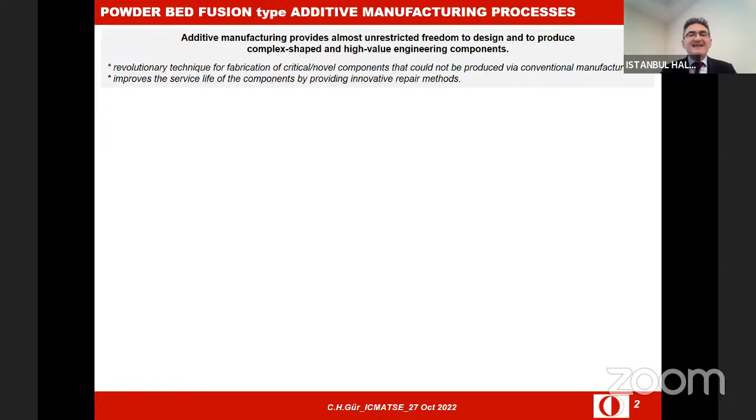As we all know, additive manufacturing provides almost unrestricted freedom to design and produce complex shapes and high-value engineering components. Specifically, powder bed fusion type processes use laser or electron beams to melt and fuse the metal powder.

However, there are some constraints which could seriously impair the structural integrity and functionality of the final products, for example dimensional accuracy, anisotropic behavior, and flaws in the component.

On the other hand, due to non-equilibrium heating and cooling, we have complex physical and chemical phenomena which may negatively affect the microstructure. For that reason, the metallurgical point of view is also very important for the success of the processes.

If we try to list the typical defects and anomalies: porosity, balling, cracking, delamination, microstructural inhomogeneity, dimensional inaccuracy, roughness, distortion, and residual stresses. These defects and anomalies are due to powder processing and post-processing stages, part design, equipment, build direction, base plate, properties of the raw material, process parameters, and also post-process parameters.

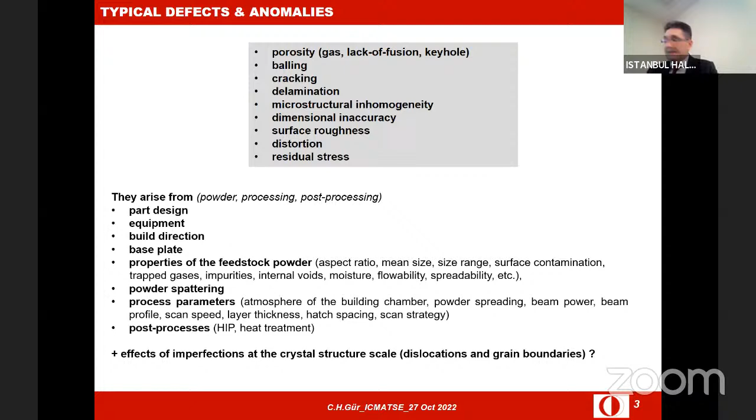We may also consider effects of dislocations and grain boundaries as imperfections, the imperfections at the crystal structure scale.

In literature, the PBF discontinuities are well defined. Here you see some examples related to gas pores. For example, the typical size is approximately 10 microns in electron beam processes, or up to 20 microns in laser beam processes. There might also be possibilities of formation of elongated pores up to 500 microns, balling, unfused powder, and cracking.

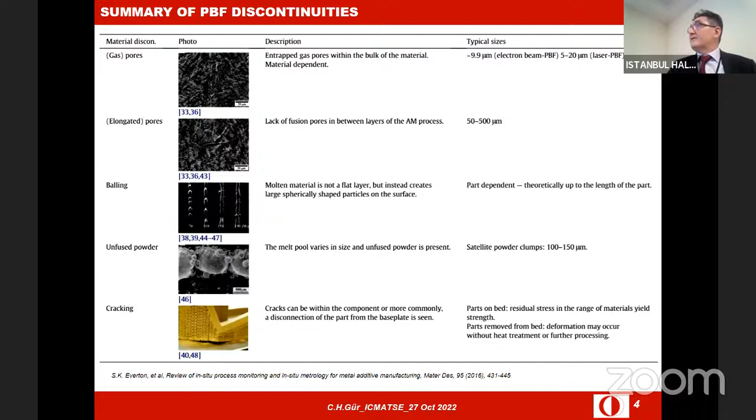What is our motivation? Variation in raw materials and process conditions may result in significant uncertainties in the final component. Specifically, additively manufactured components are widely used in high-duty components and high-duty applications.

We need diverse quality control and characterization techniques. Our aim is to verify structural integrity and performance, to identify and precisely evaluate the defects, and of course characterize material properties. Specifically, material, equipment, and processes must be qualified and certified based on performing reliable tests with a sufficient level of confidence to produce high quality parts.

Also, in-process feedback and closed-loop systems are necessary to control the process variables and performance of the processes.

On the other hand, if we try to perform mechanical tests on the components, there are some drawbacks, because the results of typical mechanical testing may not be sufficiently accurate, since test specimens that are created separately may not accurately represent the product.

Since additively manufactured parts have complex geometry and significant microstructural variability, the application or utilization of traditional non-destructive test techniques is rather difficult. For that reason, there is a need to develop innovative non-destructive tests.

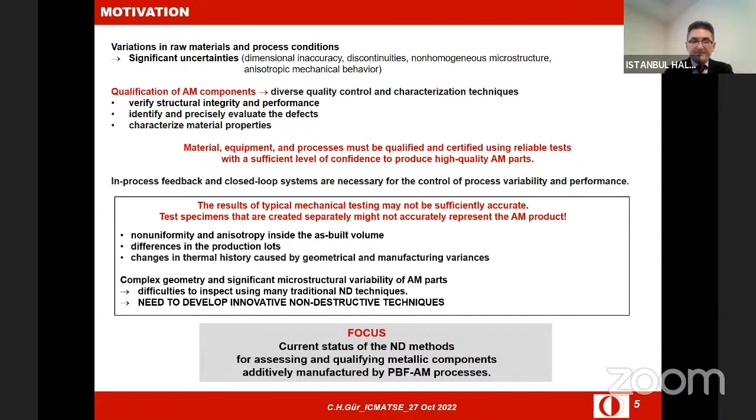We know that in conventionally manufactured parts, non-destructive testing methods have been successfully used to detect surface and internal flaws, to determine mechanical properties and residual stress, as well as long-term structural monitoring to prevent failures. For that reason, under the title of non-destructive testing, we have non-destructive inspection and evaluation to control integrity of components by detecting the defects created during manufacturing or in-service utilization.

On the other hand, there is an important field called non-destructive material characterization, to determine the properties of materials and components qualitatively, and in some cases quantitatively.

As an improvement in the concept, there is a new concept: structural health monitoring or condition monitoring. They focus on safety-critical structures, like in aerospace and nuclear industry. This approach involves feedback-based prediction of structural integrity, and we need onboard diagnostic sensors to collect continuous data about the structure.

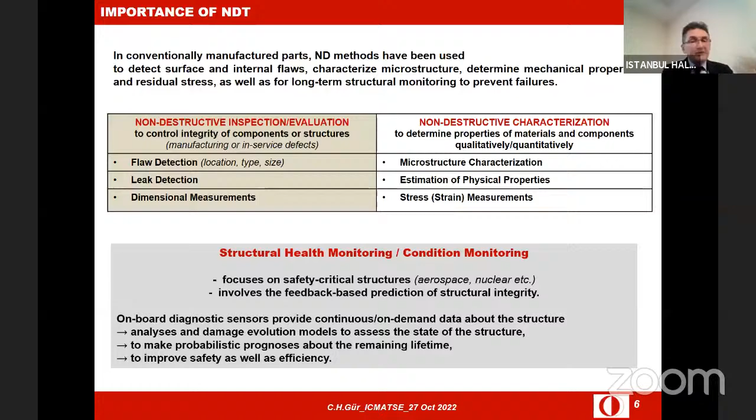What is the importance of non-destructive testing for additive manufacturing? Indeed, process optimization and high-quality products need feedback from non-destructive evaluation. We have non-destructive inspection for assessing flaws, typically X-ray, computed tomography, thermography, and phased array approaches. On the other hand, there is a way called non-destructive characterization for determining microstructure and mechanical properties.

We can say that NDT methods may play an important role in the inspection, verification, qualification, and certification of additively manufactured components. But there is a technological barrier: existing non-destructive methods are not optimized for additive manufacturing processes and products.

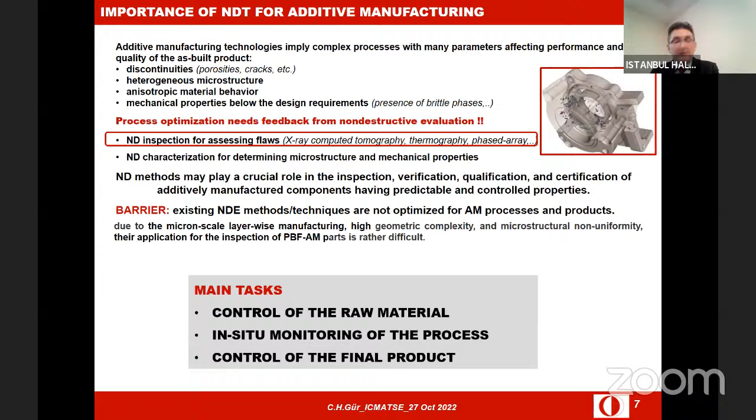If you're talking about the quality control of additive manufacturing, we have three main tasks: control of the raw material, in-situ monitoring of the process, and control of the final product. Let's go step by step.

Control of the raw material is very important because quality and properties of the raw material will directly affect the final product quality. Here you see some examples related to the types of powders having different shapes. There are also tools to characterize the powders: scanning electron microscopy to measure shape and size, aspect ratio, etc., or energy dispersive X-ray analysis to identify chemical composition and microstructure.

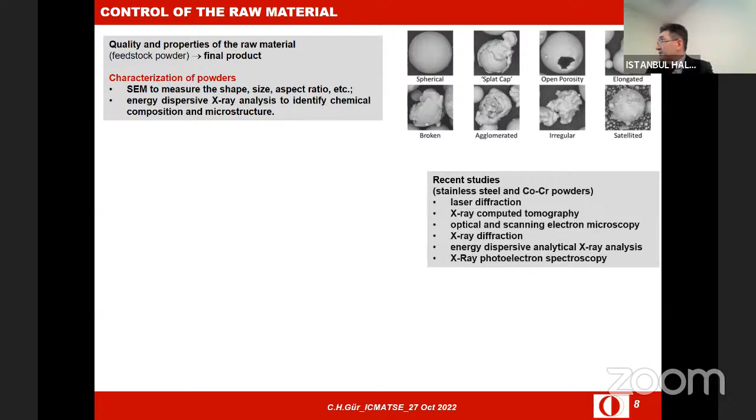There are also new applications of new tools. For example, in a recent study, the authors used laser diffraction, X-ray computed tomography, X-ray spectroscopy, etc. Here you see the range of powders used in laser melting and electron beam melting, between 15 to 45 micrometers, and in the case of electron beam melting, 45 to 110 micrometers.

Following the quality control of the raw materials, the next step is in-situ monitoring of the process, because it is known that any anomaly in the melt pool will result in defect formation. For that reason, we need in-situ monitoring to observe the defect formation in real time. This way, it is possible to reduce the defects by controlling the process parameters, and this approach also enforces development of new NDT qualification techniques.

There are various processes in literature for detection of powder bed anomalies, spattering, powder melting, etc., within the resolution range of 7 to 250 micrometers. The typical examples are visible light, high-speed imaging, high-speed infrared imaging (also called active thermography), high-speed synchrotron or X-ray imaging, ultrasonic wave scattering, and acoustic emission testing.

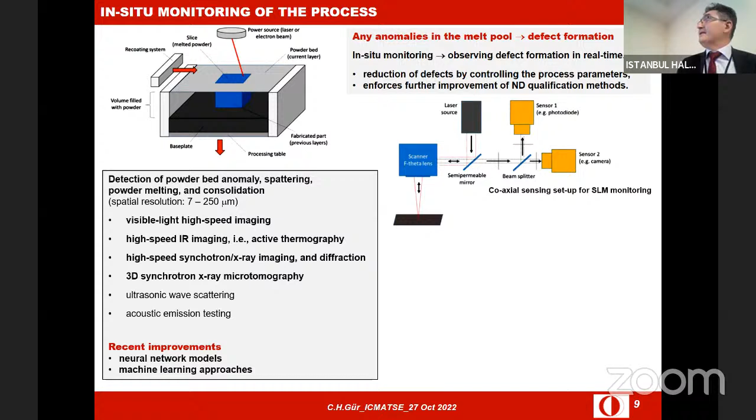Recent studies show there is a trend to include neural network models and machine learning approaches to improve in-situ monitoring. Here are some examples taken from the literature for real-time sensing for selective laser melting or electron beam melting, including application of thermography to collect real-time data from the process.

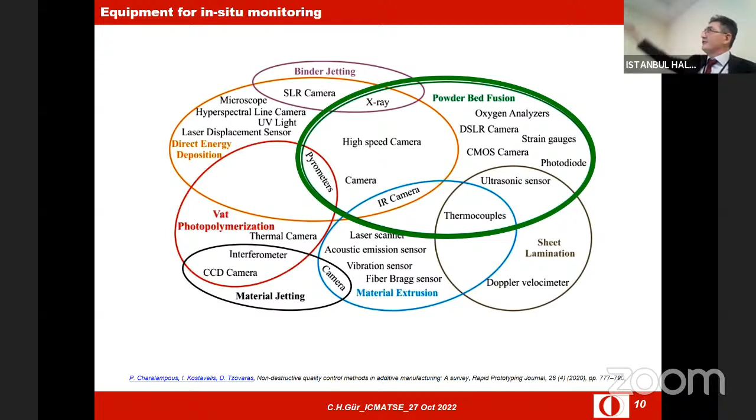In the literature, there is also a figure showing the available qualification processes for different types of additive manufacturing processes. For example, specific to powder bed fusion, here you can see the list of available technologies for in-situ monitoring.

As the final step: first, control of the raw material; second, in-situ monitoring of the process; and finally, we have to control the quality of the final product. The typical parameters are density, dimensional accuracy, surface roughness, residual stress, and of course, detection and evaluation of discontinuities.

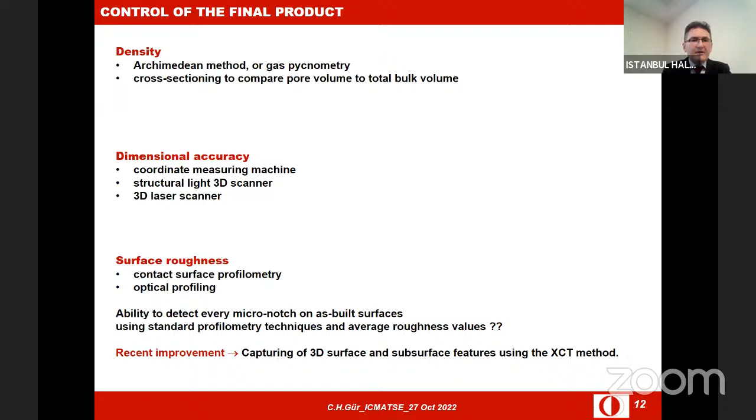Again, let's go step by step. For control of density, the Archimedean method, cross-sectioning methods, or gas pycnometry method is used to determine density. There are also tools to determine dimensional accuracy, for example, coordinate measurement machine, structured light 3D scanner, 3D laser scanner, and finally, for control of surface roughness, we have contact surface profilometry and optical profiling.

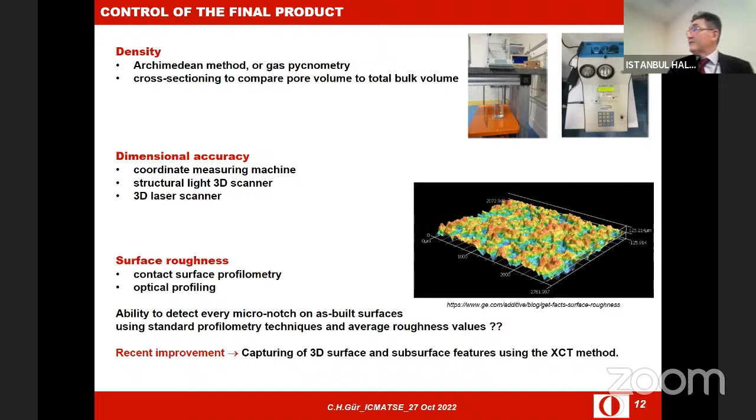However, the ability to detect very small notches and discontinuities on as-built surfaces using standard profilometry techniques and average roughness values is questionable. A recent improvement is the capturing of 3D surface and subsurface features using the X-ray computed tomography method, which allows obtaining surface roughness with very high reliability.

Another important concept is residual stresses. Severe temperature gradients produced by rapid melting and solidification, remelting of previously solidified layers at micron scale, and volumetric change due to phase transformation may result in very complex patterns of residual stress. On one hand, we have complex shapes, and due to these process and metallurgical parameters, we have relatively complex residual stress states. If there is residual stress, we may face risks: poor mechanical properties and performance, especially negative effects on fatigue behavior, and also distortion and lower dimensional accuracy.

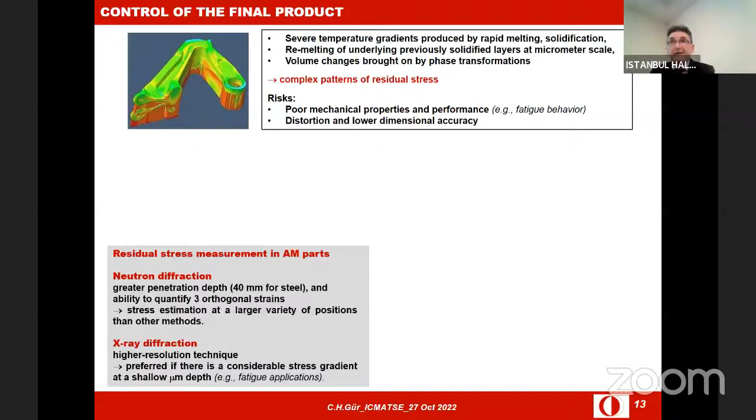In literature, there are some studies to measure the residual stresses of additively manufactured components. Mainly neutron diffraction and X-ray diffraction techniques are used. If they are based on the same issue, the changes in the interplanar spacing will affect the position of the peaks in the diffraction.

If we compare neutron and X-ray diffraction, we can briefly say that neutron diffraction has greater penetration depth, up to 40 millimeters for steels, and it has the ability to quantify three orthogonal strains and stresses, and it estimates stresses at a larger variety of positions compared to other methods.

How can we detect defects in the final components produced by additive manufacturing? The most widely used and most effective one is X-ray computed tomography, XCT. It detects subsurface porosity and features, and it provides information about the individual pore sizes and shapes in 3D. The explanation of this system is very simple.

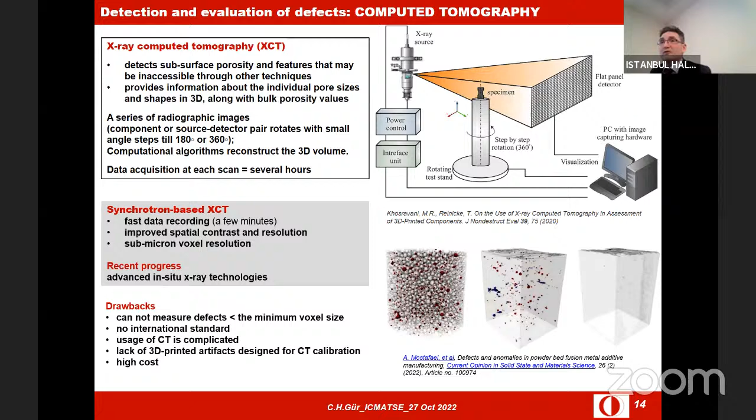Next, ultrasonic testing, pulse-echo ultrasonic testing. Traditionally, it is suitable for detection of various types of defects in a wide range of materials, having high depth. Sound waves propagate due to vibrations of atoms.

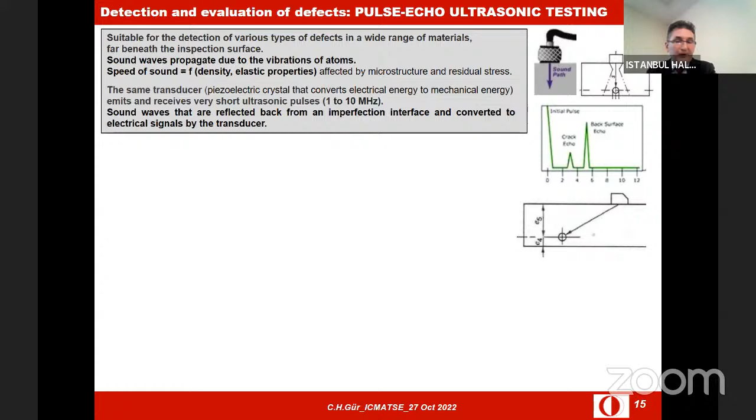In the pulse-echo system, we use the same transducer to produce the sound waves, and sound waves reflected back from an imperfection interface are converted to electric signals by the transducers. We have images, some signals on the screen, and we evaluate them to get information about the material. We have normal straight beam and angular beam probes for this purpose.

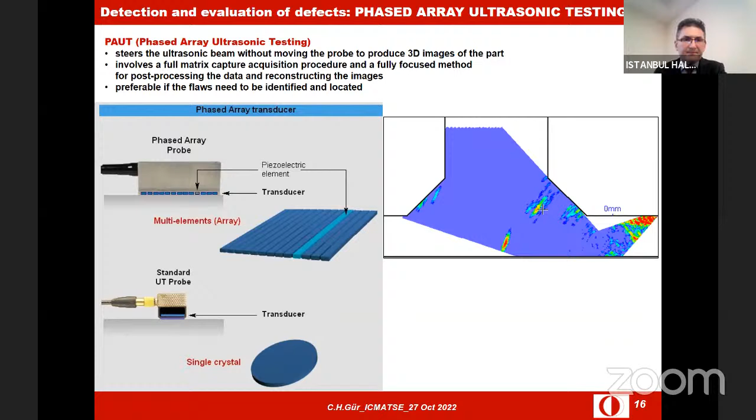The typical example to give you an idea about the phased array ultrasonic testing result is given here. By scanning the structure, the volume, we can define the defects. Of course, ultrasonic testing and phased array ultrasonic testing need surface contact.

For inspection of porosities and lack of fusion in complex shaped additively manufactured parts, we need non-contact techniques. Due to this requirement, non-contact ultrasonic techniques have been developed. Laser ultrasonics creates and detects ultrasonic signals remotely. For this purpose, we use an infrared pulse laser with nanosecond impulses.

These impulses cause a reversible thermoelastic deformation at the surface, and also create surface and volume waves in the component. By using laser interferometry, we can detect the surface displacements.

Here you see a typical example obtained by laser ultrasonics. Various ultrasonic waves are produced directly at the surface and spread out into the volume. The reflected and scattered waves from the defects can be detected by laser sensors at different positions. Then, by scanning the laser positions and reconstructing with reconstruction algorithms, we can obtain images of the object.

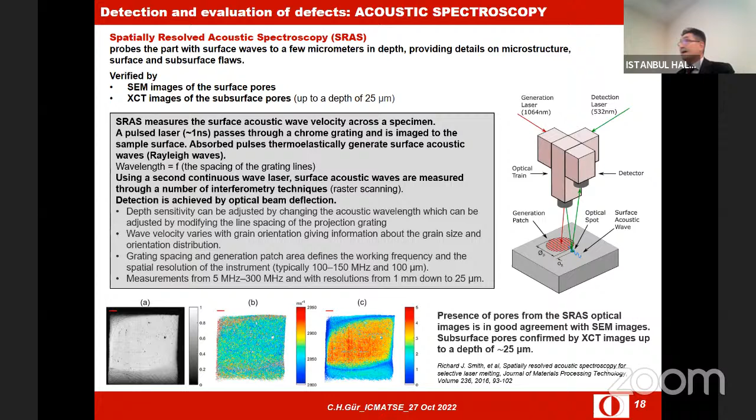Another method is the resonant acoustics method. It's based on analysis of the component's natural resonance frequencies. It is quite effective when we need sorting of defective parts. If the aim is a go, no-go approach in industrial scale, it is very advantageous. It's simply a whole body inspection approach.

First, excite the natural resonance frequencies of the test part by mechanical impulse. Monitor and collect the response of the test by a sensor, and process the data by performing a Fourier transform to obtain the resonant frequency spectrum. Then we compare the resonance spectrum with the spectrum of reference defectless parts. Any shift on the frequency peaks of a part means that there is something wrong in the material, giving a condition for pass and fail.

Acoustic emission is another method based on ultrasonics, and it's a volumetric fast inspection of as-built parts by mounting multiple sensors at different locations. When they apply external load to the system, discontinuities cause the release and propagation of elastic energy, and they create stress waves.

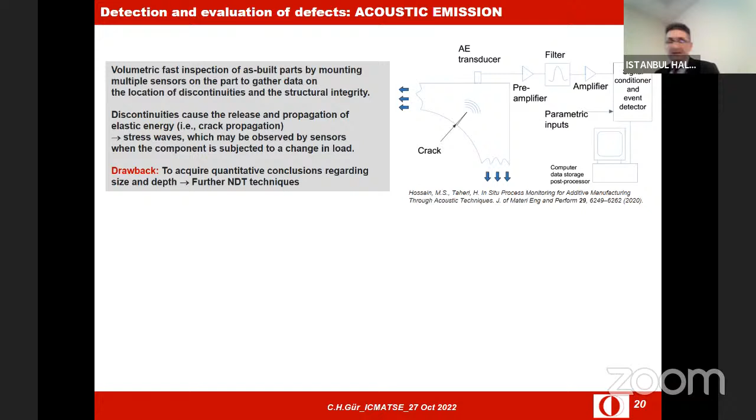These waves can be detected by sensors. The main drawback is we can only get information about the presence of the defect. However, for detailed quantification, we need other NDT techniques. Here you see some examples related to acoustic emission.

Another method is eddy current. It's based on electromagnetic theory. A special coil energized with alternating current near the surface creates a magnetic field, and it interacts in the part, resulting in eddy currents.

If there are some electrical conductivity variations or any discontinuity in the component, it will cause some signals. In literature, there is a paper related to the application of eddy current for defect detection in additively manufactured components. A multi-frequency eddy current approach enables the differentiation of various structures, surface textures, and various pore size lattice architectures simply by measuring the electrical conductivity.

However, it has some restrictions. It is effective at very low depth, and it is not appropriate for components having a volume less than 1 centimeter cube.

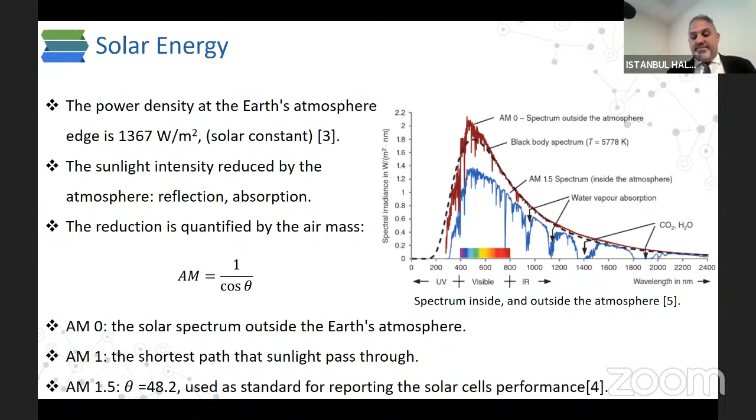Now, again, it's not perfect. Many things can go wrong - light reflected back, recombination at the interface - so you don't get one electron for every photon. So you may get 20 or 30% efficiency, and that's what we try to improve with time.

There are some key parameters we deal with in solar: the current, how much comes out of your solar cell, and the voltage. When you buy a solar panel, you'll see a label that tells you the current, power, and voltage for your solar cell. There are other important parameters too, like efficiency, which is how much power comes out divided by the power provided. We try to get this power efficiency to be as high as possible - ideally we want it to be 100%.

But again, we're limited by the materials we have, because the sun has to be absorbed in those materials. We have semiconductor silicon, which has a certain band gap, so it's only going to absorb a certain part of that big sun spectrum. That's why we stack various materials on each other and do various engineering to improve those efficiencies. Okay, so that's a little bit of background.

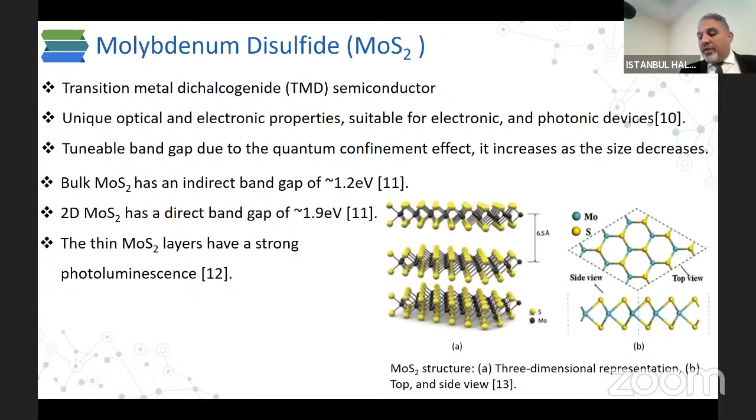Before that, I wanted to briefly mention that before this MoS2 work, we did some work with one of my former PhD students where we made a graphene silicon solar cell in our lab in Khalifa University, where the student grew graphene by CVD and fabricated a solar cell with quite high efficiency. It's one of the early results in this field. And what made that work unique was the challenge of the interface between the graphene and the silicon. Because if you leave it for some time, you get oxidation, which hurts the interface. You get a lot of traps and it ruins the interface between the graphene.

So we said, okay, let's try to put a very thin interfacial layer of ALD to improve that interface. And you can see here the two different devices, one with the passivation, one without. From the solar cell I showed you before, we can see a very nice improved efficiency, fill factor, and current with the ALD. So that was one of our first experiences in 2D materials in solar, and one of the first work showing ALD use at the interface.

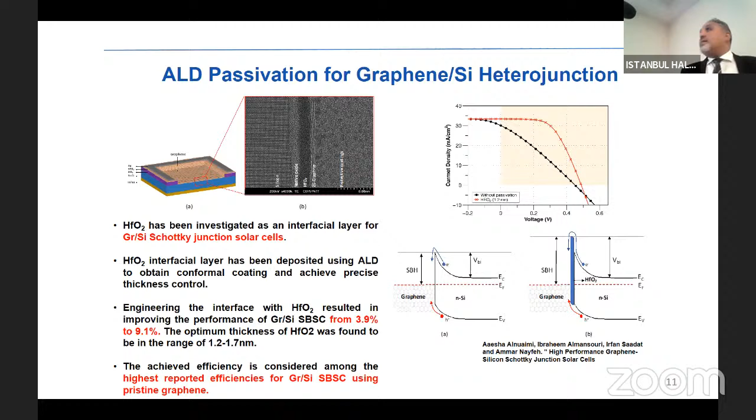So when I first joined the university in 2010, it was a new kind of university, and we had this basically an empty room that we had to develop into this clean room facility. It took a lot of time and effort, but now we have a functional working clean room we've had for the last 9 or 10 years.

It's the only clean room in the UAE and one of the first in the Middle East in that part of the Gulf world. We were able to do ALD, atomic layer deposition, lithography, graphene CVD, and we fabricated many devices in this laboratory.

So many of the KU publications and PhD theses come from this facility. We also have amazing microscopy where we can analyze these devices. We have one of the highest resolution TEMs in the world, able to look closely at the interface to analyze the physics of what's going on. We can also measure solar cells using solar IV and quantum efficiency measurements in the laboratory.

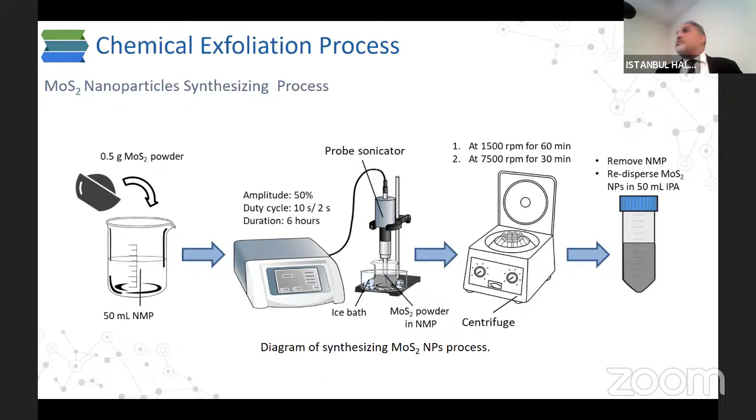If you look at the final bottle of suspended MoS2 nanomaterials ready for deposition, that's how it looks - it kind of looks all solid, like a rock in some aspects. When you move them to the end, that's the final one we can use to deposit our material.

So how do we take that and make a layer, make a thin film? We did it with what's called drop casting - a quite simple, straightforward method. We clean the substrate, passivate it with hydrofluoric acid to make sure there's no dangling bonds or native oxide, and immediately we drop a known exact quantity, then let it sit there and let the solution evaporate for some time.

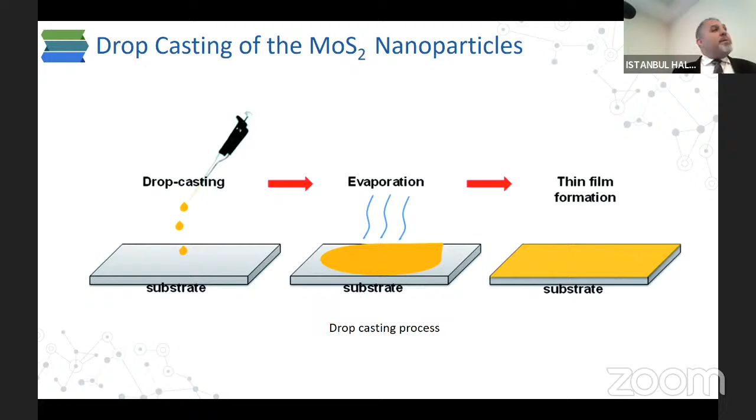Eventually the solution evaporates and you're left with what's called a thin film of MoS2. The more quantity you put, the thicker you can get, or the more coverage you can get of the MoS2. This also took some time to optimize the process.

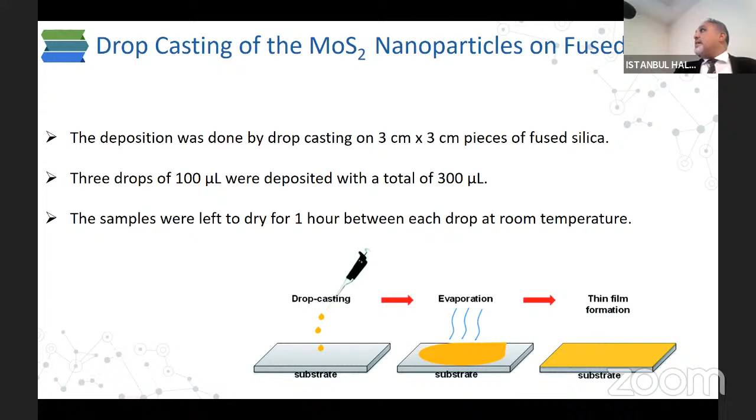Okay, now that we have the material, how do we make the actual device? The first thing, we took a silicon, but in this case we wanted to characterize it first. So we took a fused silica, kind of like a glass type material, deposited and left it, and created our thin film.

Then we wanted to understand—I told you the MoS2 had a certain band gap in literature—but we wanted to see what band gap our MoS2 was giving. So in order to get the band gap, we wanted to shine some light through it and see how much light is being reflected, how much is being transmitted, and how much is being absorbed.

Based on that, we can calculate the band gap of the material. So what's plotted here is transmission, reflectance, and absorption of the MoS2 with different quantities. On the far left is transmission. The black line is fused silica, so everything goes right through. Once you add some MoS2, you can see the red—there's some absorption happening—and by the time you get to 300, a lot of it is being absorbed.

You can see in the reflectance and absorption curve on the far right, almost 80% of the light is being absorbed up to around 750, and then it starts to drop a little bit. But the main conclusion is we get a very high amount of absorption for a very thin layer. That made us believe this is a good material for solar, because it can absorb a good amount of light. So how do we get the band gap?

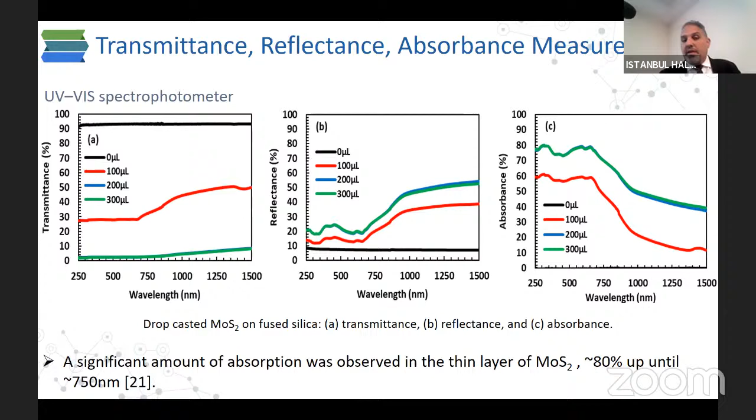So how do we then continue making the actual solar cell? In our clean room, we were able to take a silicon wafer and cut it into a certain square. The wafer was already p-type. Based on our literature, we knew that MoS2 would behave like an n-type material. So we started off with a p-type, just based on our own literature review.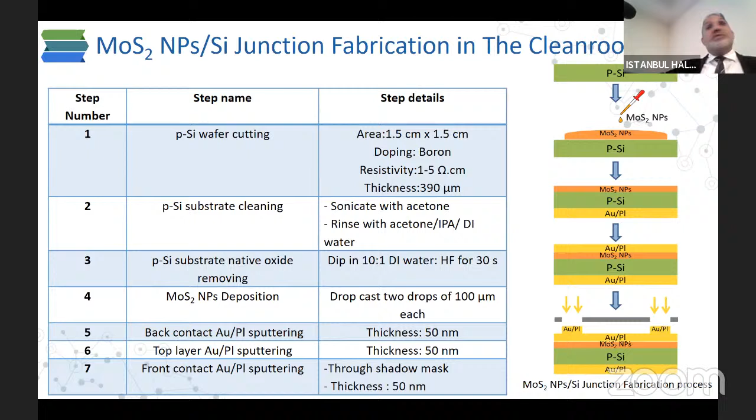And when we did our conductivity measurement, it confirmed that it was an n-type. Then we do the drop casting we mentioned, and after that we have a layer. We can then put our metal and etch the metal to create our structure. So at the end, we have an MoS2-silicon device, and then we have a contact on top to measure it.

That's how it looks—that's a mask we use to put the metal. The metal will come through that mask and create fingers of metal. We can also deposit some metal using what we call a sputter coater at the time for the metal. The final device looks like that. That's our solar cell on the left, and that's the cross section—a metal finger array, followed by the MoS2, followed by a silicon substrate.

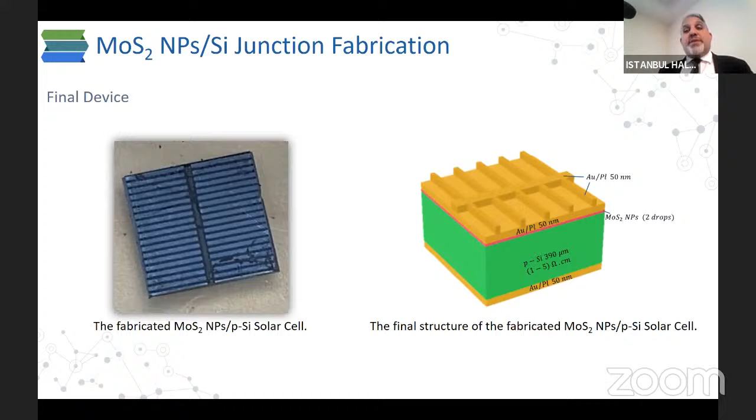The reason we do that is, if I make a solar cell and you guys make a solar cell, we have to be able to compare. If everybody's measuring at different parameters, it doesn't make sense. There's a famous plot by NREL in the US where they plot solar cell data as a function of device and time, and all that is done properly at the right condition.

But the good news from a physics standpoint is we do see a working PN junction from MOS2 silicon. The improvement in the parameters will come as we improve the performance. We're also going to try the ALD interfacial layer and make the metal contacts a little bit thicker, so we get some improvement in the device.

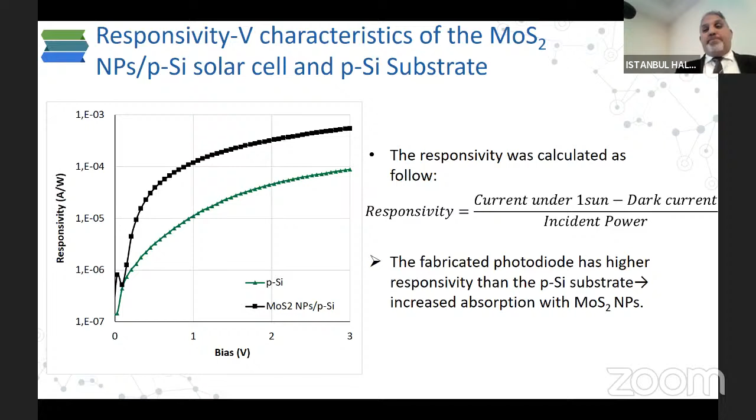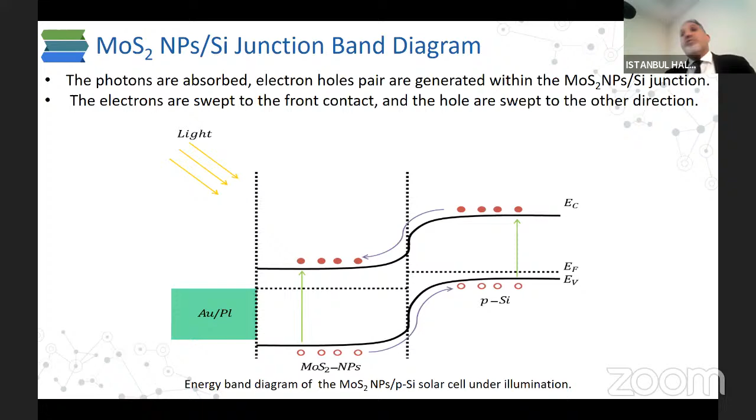So if you look at it more closely, the light will come in, it's absorbed in the MOS2 silicon interface. We get the electron hole pairs, and we're able to separate the electrons and the holes at the interface and measure solar cell parameters. It's a good first step, and one of my students is now working on improving this process.

So in summary, we used MOS2 nanoparticles, synthesized using chemical exfoliation. We used SEM to show some good coverage, made a thin film. We showed very high absorption of the MOS2 nanoparticle. We made a solar cell and photodiode with the MOS2, and we confirmed the solar cell is working, getting very high absorption from the photodiode. We saw a large increase in current, meaning the responsivity is very good, and the absorption in the MOS2 is quite great for a photonic application.

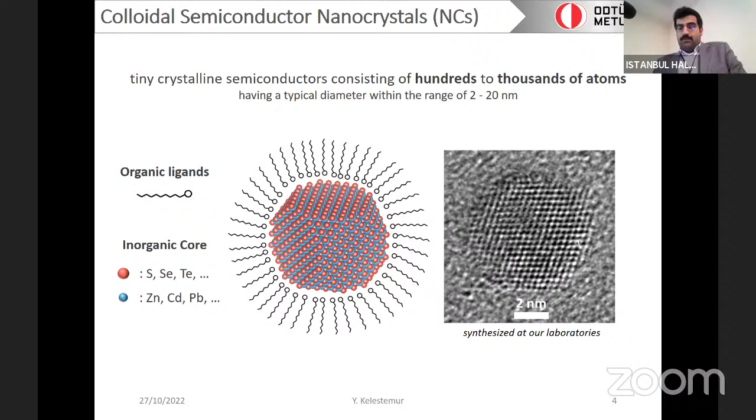Colloidal semiconductor nanocrystals can be defined as tiny crystalline nanoparticles. As you can see from these transmission electron microscopy images, they're composed of an inorganic core having a crystalline structure, covered with organic ligands which allow them to form soluble suspensions in different kinds of solvents.

What's unique about these nanocrystals, what makes them effective, is the observation of the quantum confinement effect at that length scale. For bulk semiconductors, we've discussed the conduction band and valence band, which are separated by a certain energy bandgap.

However, this bandgap is fixed and depends on the material. We can tune it by alloying or other approaches, but it's not easy to control easily. But when we synthesize any kind of nanocrystal, without changing the composition, simply by changing the size of the nanocrystal, we can observe discrete changes in the band structure of the material.

Due to having a finite number of atoms in the structure, the band structure becomes quantized, and as we decrease the size of the nanocrystals, the bandgap increases. These are some of the main attractive properties of nanocrystals.

As a result, they exhibit size and shape dependent optical properties. Here, for example, you can see absorption and photoluminescence characteristics of cadmium selenide nanocrystals. These are all the same nanocrystals, but depending on their size, we can obtain emission at different wavelengths. Typically, as we increase the size of the nanocrystal, their emission shifts from blue to the red side.

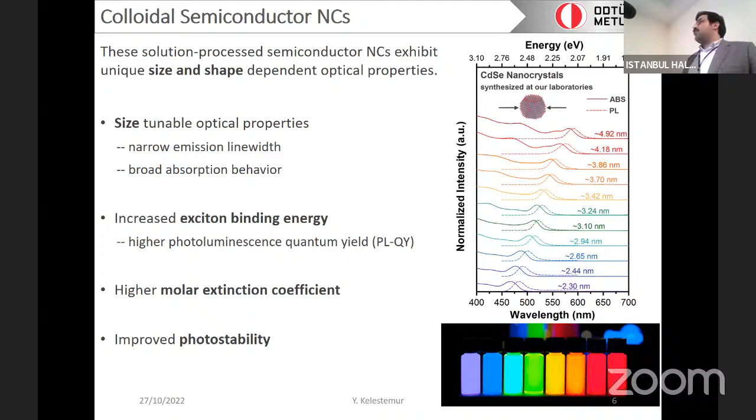And also they exhibit very high molar extinction or absorption coefficient. And when we compare their stability as compared to traditional organic molecules, they exhibit improved photostability.

Their synthesis is also very simple. It's similar to cooking, or in chemistry they are called a cooking. What we are doing is we typically add our solvent and precursor.

After the dissolution of, for example, for the synthesis of cadmium selenide, first of all we dissolve one of the cadmium precursors. Then at high temperature we immediately inject the second precursor into the solution, and it causes an increase in the concentration of the precursor in the solution above the nucleation threshold. So this nucleation process is started.

After that, since most of the precursors are consumed during the nucleation, the concentration of the precursor decreases below the nucleation threshold. So the synthesis continues with the growth process.

Initially this was a kind of black box, so it was not easily known what the effect of the precursor was. But nowadays the control over the synthesis has greatly enhanced.

We can synthesize different sizes and shapes of nanocrystals having highly monodisperse and uniform size distribution. It is even possible to synthesize heterostructure nanocrystals, which means we can combine more than two different types of materials in one nanocrystal.

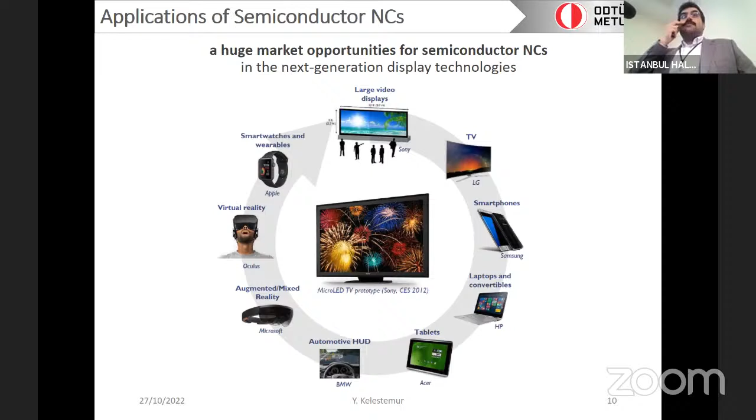Nowadays in many electronic devices we have started to see this display technology - we can see quantum dots in television. However, in the future it is also expected they can take place in smartphones, automotive head-up displays, and virtual reality. There's a huge market for semiconductor nanocrystals, and it's expected that within 5 or 10 years, most displays will use colloidal semiconductor nanocrystals.

But for the case of spherical shaped nanocrystals, there are some deficiencies or limitations. For example, their emission can be tuned by size, but when we synthesize, there is some size distribution, and as a result we observe some broadened emission spectrum.

When we analyze the emission spectrum of only a single nanocrystal, we observe very sharp emission. However, when we look at the ensemble spectrum, we observe a very broad spectrum. So this is one of the limitations - we want to further achieve very sharp emission from this nanocrystal.

The second problem is the enhanced Auger recombination rate at this small length scale. Typically, what happens is when we excite a semiconductor, electron hole pairs are generated, and after some time they recombine and emit photons.

However, at high excitation, or when we pump our nanocrystal very hard, more than one electron hole pair can form in the nanocrystal.

However, sometimes the recombinational energy of the electron-hole pair is not released as a photon. Instead, it can transfer to a third particle, either electron or hole, so it's a kind of non-radiative loss. Typically for nanocrystals, these Auger recombination rates are enhanced, which is one of the drawbacks of semiconductor nanocrystals.

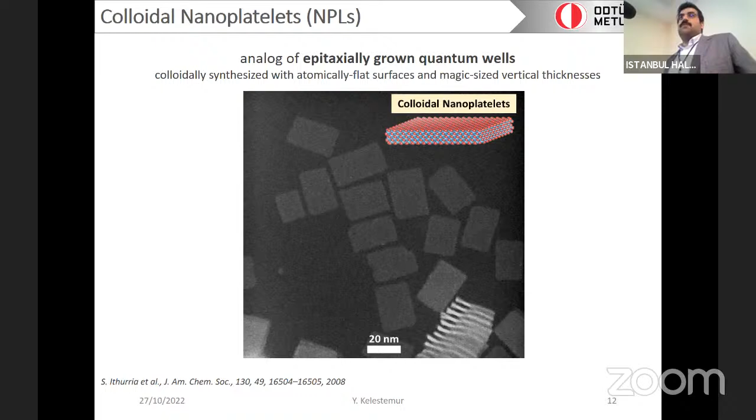These are TEM images where you can see the lateral dimensions are tens of nanometers, but the vertical thickness from the stacked nanoplatelets is just 1 nanometer. So they can be considered analogs of epitaxially grown quantum wells, with the difference that we don't need any special substrate to grow them. We can synthesize them in solution and apply any kind of substrate.

Here we again observe the quantum confinement effect, but this time we can tune their emission and absorption characteristics by changing the thickness. As we increase the thickness, we again observe redshift in their emission and absorption characteristics.

What is so important, or so attractive, about this nanocrystal is that this larger surface is atomically flat. This means that in a solution of nanoplatelets, all of them have exactly the same thickness. As a result, there is no broadening effect due to size distribution, and so they exhibit a very narrow emission line.

It's one of the narrowest emission linewidths compared to any organic or inorganic emitting materials. They also exhibit very high oscillator strength, with electrons and holes strongly confined, because in addition to the confinement effect, dielectric confinement also contributes. So these electrons and holes have a giant oscillator strength, and due to their two-dimensional structure, this also helps further suppress Auger recombination.

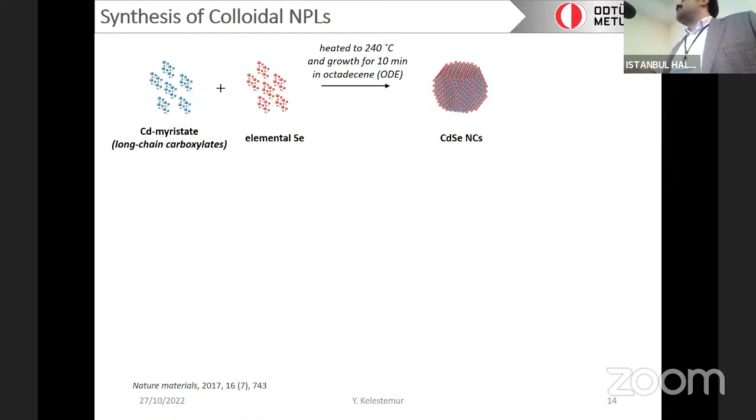As I said, it's a kind of accidental discovery. Typically for cadmium selenide nanocrystals, we use a long-chain cadmium carboxylate as the cadmium precursor and elemental selenium, with octadecene as the solvent. When we heat to 240 degrees and wait about 10 minutes, we end up with spherical-shaped cadmium selenide nanocrystals.

However, when after nucleation of small cadmium selenide nanocrystals we introduce a short-chain cadmium carboxylate, such as cadmium acetate, in addition to the normal nanocrystals, we observe that two-dimensional particles are also formed. It's still an ongoing discussion how these particles actually form.

One of the most widely accepted explanations is that adding this short-chain carboxylate changes the reaction kinetics. For example, newly growing monomers, instead of creating islands on the wide faces, find it easier to grow on the narrow faces due to decreased surface energy, so they prefer to grow on the edges.

This is the most widely accepted theory for how these two-dimensional nanocrystals form, because their crystal structure is also cubic, zinc blende. So how such an anisotropic shaped particle forms from that isotropic crystal structure is still an open question.

Since we know this approach works, we now focus on synthesizing different kinds of two-dimensional particles using it. We can synthesize nanoplatelets with the same thickness but tune their lateral dimensions, making them rectangular or square. Since their thickness is the same, they are strongly confined only in the vertical direction, and their lateral dimension doesn't affect their emission and absorption characteristics.

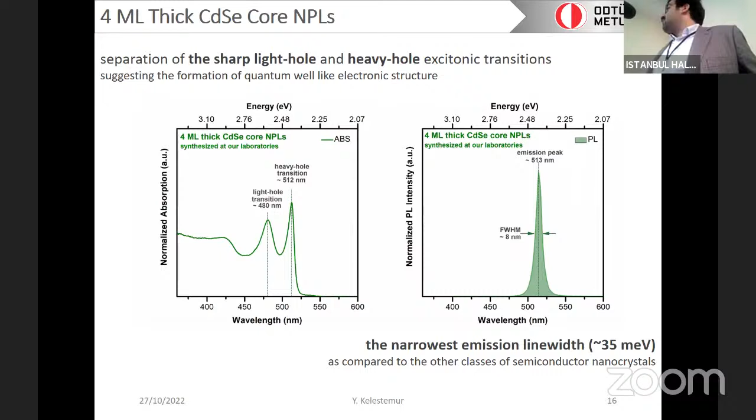We observe emission, for example, at 512 nanometers, with an emission full width at half maximum of roughly 35 millielectron volts. Room temperature KBT is roughly equal to 25 millielectron volts, so this is one of the narrowest emission materials available.

Typically, for the case of nanocrystals, we cannot use this core-only nanocrystal in any kind of semiconductor devices, because typically due to their larger surface area, the surface atoms create some mid-gap states which quench the emission.

So as a result, what happens? This excited electron and hole can be trapped by this mid-gap state, and it decreases the efficiency and also the stability of the nanocrystal. So typically what we are doing is synthesizing some core-shell heterostructures.

Depending on which material we cover or grow on the core material, depending on the band alignment - for example, for the case of type 1, if we grow a material having higher band gap, we can confine this electron and hole away from the surface and increase the efficiency of the nanoparticles, because now the probability to be captured by surface traps is decreased.

So with these two-dimensional nanoparticles, we also have another exciting feature: we can have two types of conditions for growing the shell. It is possible to grow only in the lateral direction without any coating on top of the core nanocrystal, or we can also grow in the vertical direction, having some core-shell structure.

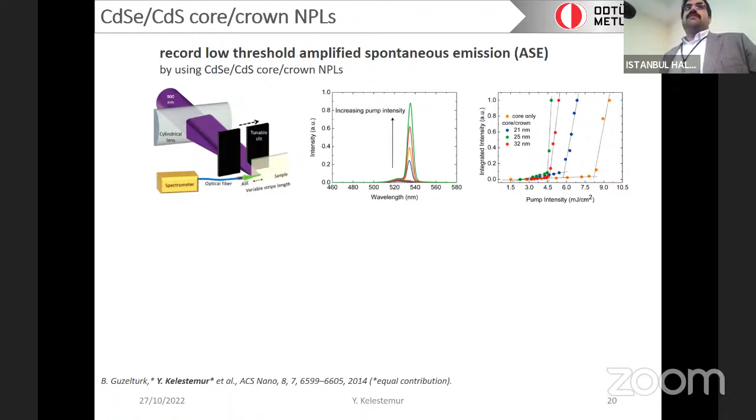Then after that, we use this material as an optical gain medium. We excite with an 800 nanometer femtosecond laser beam, and as a function of the pump intensity we check the emission profile. We realize that after pump intensity exceeds roughly 4 millijoules per centimeter square, we observe stimulated emission, which is required for lasing or optical gain.

After that, we integrated this colloidal material into a DBR. This DBR we made at that time had difficulty with vacuum deposition, so we also made this DBR using silicon dioxide and titanium dioxide nanoparticles. So we demonstrated optical gain using an all-solution-process fabrication.

We take 3 different kinds of nanoparticles and make alternating spin coating, and we obtain one of the lowest lasing thresholds.

After that study, we also wanted to study different heterostructures of this material, and we synthesize different kinds of heterostructures. We also make some alloying, or try different heterotypes of this nanoplatelet in order to tune their structure.

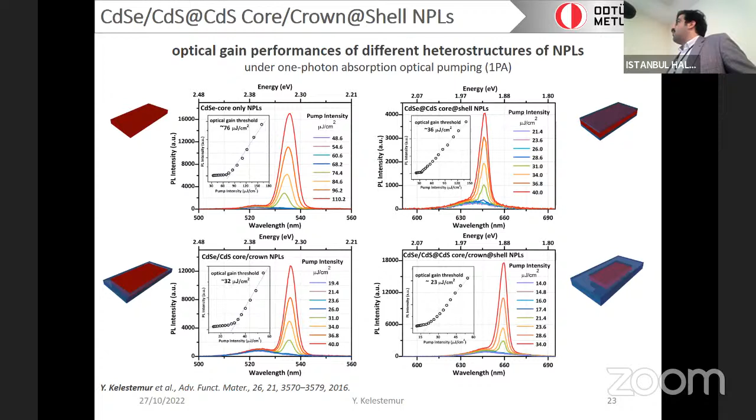This is one example where we grow core-crown-shell nanoplatelets to further encapsulate the core and passivate it very nicely. As a result, we obtain very highly stable optical gain performance.

Another problem: by increasing the thickness we can change their emission, but these emissions occur at discrete wavelengths. For example, a 4-monolayer nanoplatelet always emits at 512, or 5-monolayer cadmium selenide emits at 550.

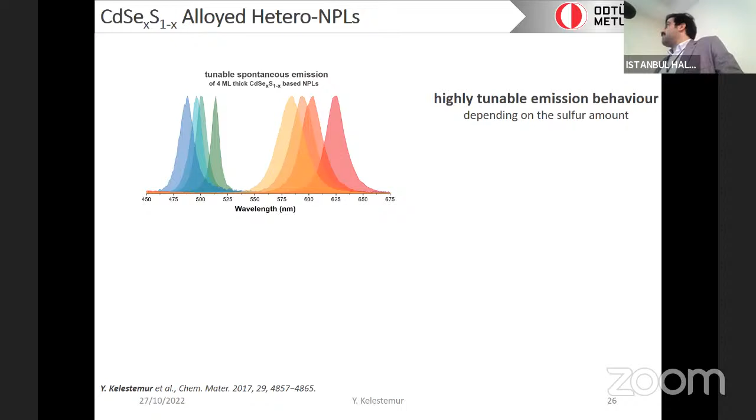In order to cover this discrete emission characteristic, we make some alloying, and as a result we overcome this limitation. We show that it's also possible to synthesize these nanoplatelets with highly tunable emission characteristics, and we demonstrate they can be used as a gain medium for lasers.

As I said, this previous structure can be considered type 1. However, it is also possible to synthesize type 2 structures where, depending on the band alignment, we can separate the electron and hole in the structure.

So this structure is attractive for light harvesting or solar cell applications. When making this study, we also tuned the compositions and achieved highly tunable emission characteristics.

Also another exciting thing, as compared to a semiconductor, this band edge emission due to the combination of electron in the cadmium selenide with the hole in the crown region, they emit a photon having a lower energy than the band gap of these two materials.

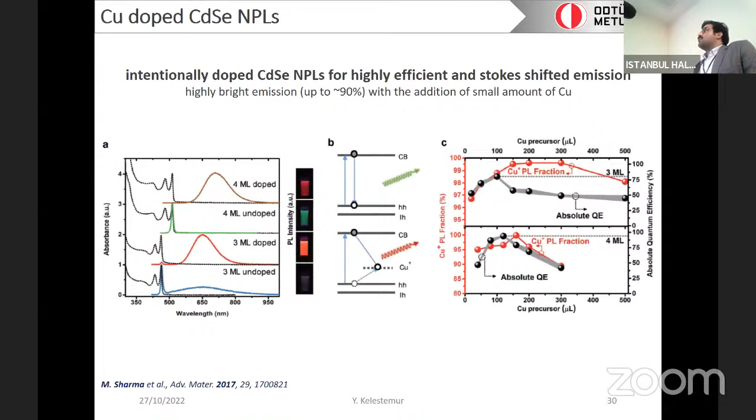So in this study, we made this Stokes shifted emission by using tellurium doping, and we also show it can be made by doping with copper. As you can see, when we shine light, it is very bright on the edges, and when we put the solar cell there

these are very attractive for the future smart building concept. In the second part, I would like to mention our other studies on colloidal nanoplates for light emitting devices. Nowadays, displays on the market use this color conversion approach.

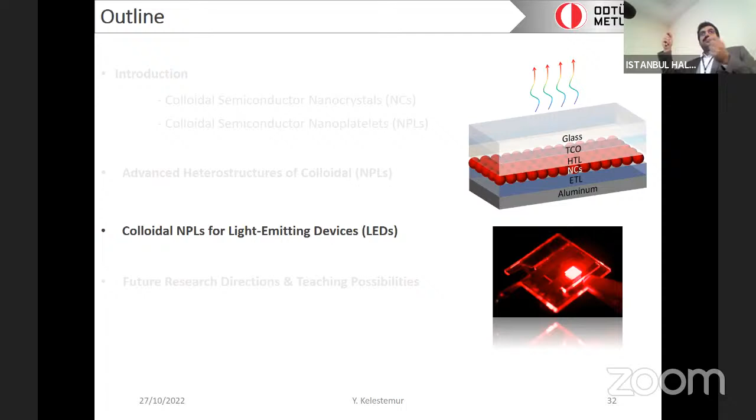In that case, it's a kind of passive device. But here, we would like to mention active light emitting devices where we observe charge injection, so we observe electroluminescence from the nanocrystal layer.

Our purpose is to achieve a wide color gamut due to the narrow emission characteristics of the nanoplate. Also, similar to organic light emitting devices, the typically observed characteristic for such nanocrystal-based LEDs at high current density is efficiency droop, and one of the main reasons is attributed to non-radiative Auger recombination.

Here, for example, with the typical device architecture, we have ITO covered glass. On top of it, we deposit a hole transport layer, then our emitter, then an electron transport layer, and after that we deposit our metal electrode layer.

And then we pass some current. Holes are injected from this side, and electrons are injected from the other. So at the emitter, we observe recombination of the electron and hole pair.

However, when we look at what is the maximum efficiency we can obtain from the LED, that can be calculated by multiplication of different processes. So, what is the injection efficiency of the electron and hole?

All these injected charges are injected to our active region, so we can make it 100%. There is no problem; by adjusting suitable layers, we can make it 100%.

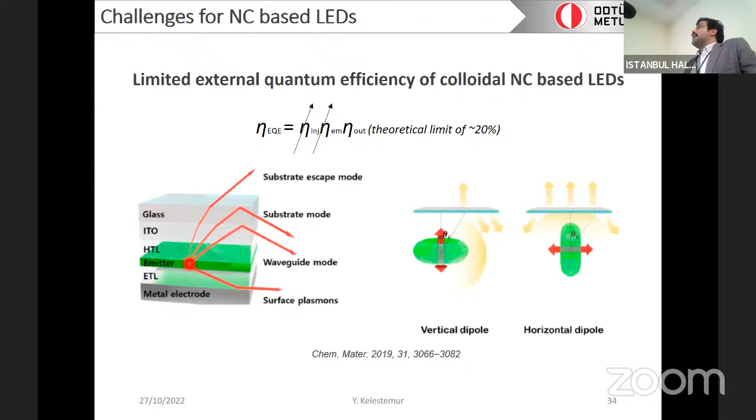So by using the nanoplatelet having an anisotropic shape, with the arrangement of the dipole we can further increase efficiency and achieve very high efficiency without using any kind of photonic structure.

So one of the difficulties with these nanoplatelets is that, having a very large surface area, they are not energetically stable, or at high temperature they can easily dissolve or their structure is disrupted.

So what we did, we developed a new synthesis growth approach at very high temperature. To avoid etching and dissolution of the core nanoplatelets before the shell growth, we add some nanoplatelets to the mixture after starting the injection of shell precursor. As a result, we partially overcome the dissolution of the core.

Here you can see some TEM images and EDS mapping. We obtain core shell structures where cadmium sulfide covers the cadmium selenide core region, and our crystalline structure shows that our nanocrystal has a nice crystal structure.

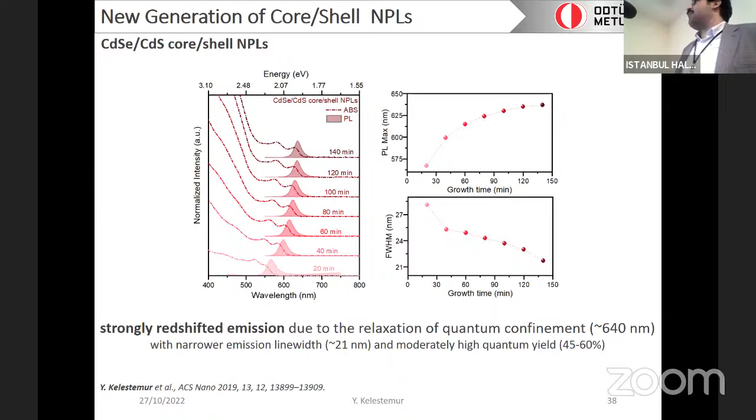With the formation of the shell, as the thickness increases, we observe the emission is redshifted, and at the same time, with the growing shell, we decrease the full width at half maximum up to 20 nanometers. However, with this kind of particle, we couldn't exceed 60%.

For example, this kind of heterostructure can also be synthesized with spherical shaped nanoparticles, and 100% efficiency can easily be obtained. However, with this nanoplatelet, we couldn't achieve that. Possible reasons are having a larger surface to volume ratio, and also the growth of the shell is not uniform here.

You will see some bright and dark regions, corresponding to variation in the thickness of the shell. So it doesn't grow uniformly. You can assume that this core shell nanocrystal has a donut-like shape.

The band alignment of cadmium selenide and cadmium sulfide is such that we don't have proper passivation for the electron when we have the cadmium sulfide shell, because electrons can easily escape.

So we propose to grow a multi-shell structure, where the sulfide acts as a buffer layer. With this configuration, they also show a nice uniform size distribution.

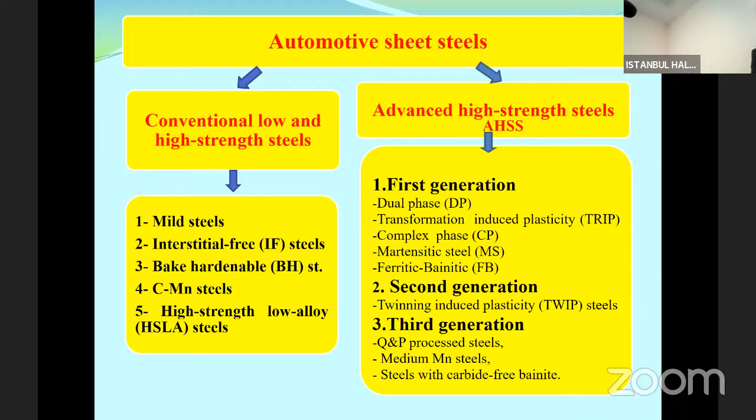Önceden işte alışılagelmiş bir çelik vardı. Efendim işte Mercedes hatırlayın, kaportası çok kalın, tank gibi araba falan ifadeleri kullanılırdı. Şimdi öyle bir dünya kalktı. Araçlar hafiflemeye başladı, fazla indirmeye başladı ama mukavemet özellikleri düşmüyor tabii. Neyin sayesinde? İşte bu özellikle ikinci, üçüncü nesil hala dual fazlar kullanıyor. Bu çelikler sayesinde biz araçlarda hafifletme yapıp güvenlikte ödün vermeden bunu sağladık.

Şimdi bir araca baktığımız zaman aracı iki ya da üç gruba ayırıyoruz. Aslında iki grup aynı: ön kısım, arka kısım ve yolcu kısmı, şoförü de içeren kişilerin oturduğu güvenlik kısmı diyelim. Şimdi ön ve arkalarda arkadaşlar buralar çarpışma zonları, bölgeleri.

Yani şöyle bir anlayış yanlış: ya ben araçla çarptım duvara ya da bir yere çarptım, kaportada herhangi bir ezilme olmadı. Böyle bir dünya yok. Bu yanlış bir ifade, yani yanlış bir çelik seçimi.

Çünkü şu andaki güvenlik kuralları şunu istiyor arkadaşlar: aracın çarptığınız zaman ön ve arka kısmı akordeon gibi ezilsin. Çünkü aksi takdirde o enerji size yansıyacaktır. Yani siz araçta kaza geçirirken size bir şey olmaz ama bir süre sonra belki iç kanamadan ölebilirsiniz.

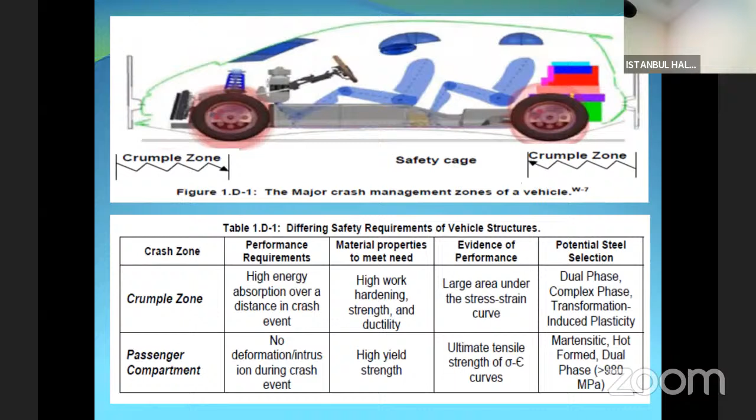Oradaki herhangi bir deformasyon sıkışmadan yolcuları sıkıştırabilir, şoförü sıkıştırabilir. Onun için arkadaşlar işte çelik bariyer dedikleri vesaire ifadeler var. Malum her taraf çelik ama biz hala oraya çelik bariyer diyoruz. Oradaki o çelik bariyer ifadesi aslında güçlü bir çelik anlamı taşıyor. Şimdi bakın şeye bakalım, çekme diyagramına bakalım.

Şimdi dual fazlı çeliklere baktığımız zaman, bunlar iki fazdan oluşuyor: biri ferrit, diğeri martensit. Martensit oranı belli bir değere kadar isteniyor ama temelde matrix, ferrit matrix, sünek bir matrix var. Martensit sert bir faza sahip, sertliği yüksek, mukavemeti yüksek. Dolayısıyla hem sert hem uzayabilen iki fazı bir yapıda birleştiriyoruz. Malzeme belli bir yere kadar uzayabiliyor, ondan sonra martensit devreye girdiğinde malzemenin mukavemeti artmış oluyor.

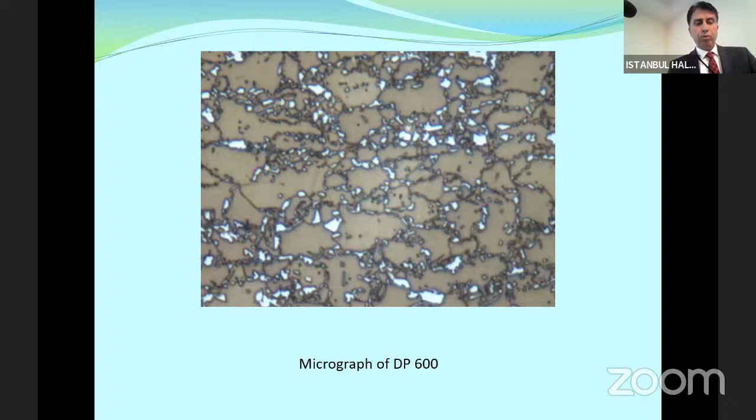Bunların kimyasal bileşimlerine baktığımız zaman karbon oranları düşük. Mangan belli bir seviyeye kadar artmış, yüzde 2'lere kadar çıkmış, hatta 2'yi aşan versiyonları var. Normalde çelikte normal sayılarda mangan çok bulunmaz, mesela 1.2, 1.5'e kadar çıkabilirsiniz manganda. Ama burada mangan biraz daha yüksek bu tür çeliklerde. Karbon oranımız düşük.

Bunların ısıl işlemini A1, A3 arasında yapıyoruz. Yani östenit ferrit arasına malzemeyi ısıtıyoruz, oradan suya çekiyoruz. AC1 dediğimiz 723 santigrat derece, AC3 dediğimiz çeliğin karbon içeriğine bağlı olarak tam östenit bölgesine geçtiği sıcaklık. Nihai mikro yapıda ferrit artı martensit istediğimiz için ferriti baştan elde etmemiz lazım. A1-A3 arasına ısıttığınızda çelikte ferrit ve östenit var. Oradan suya çektiğinizde ferritte herhangi bir dönüşüm olmaz. Çelikte bütün dönüşümler östenitten olur. Ferrit martenzite dönüşmez, ferrit beynite dönüşmez. Bütün dönüşümler östenitten oluşur, onun için mutlaka östenit yapı elde etmemiz lazım.

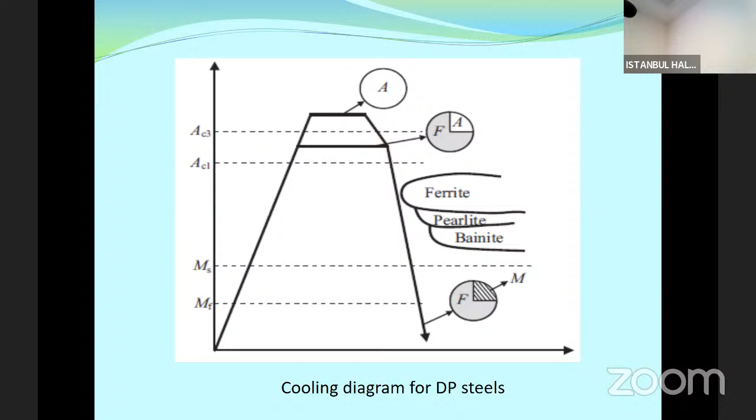Katmış olduğunuz mangan miktarına göre, karbon miktarına göre akma ve çekme dayanımını değiştirebiliyorsunuz. Mesela DP 700/1000 diyor, bu şu demektir: 700 megapascal akma dayanımı var bu çeliğin, 1000 megapascal da çekme dayanımı var.

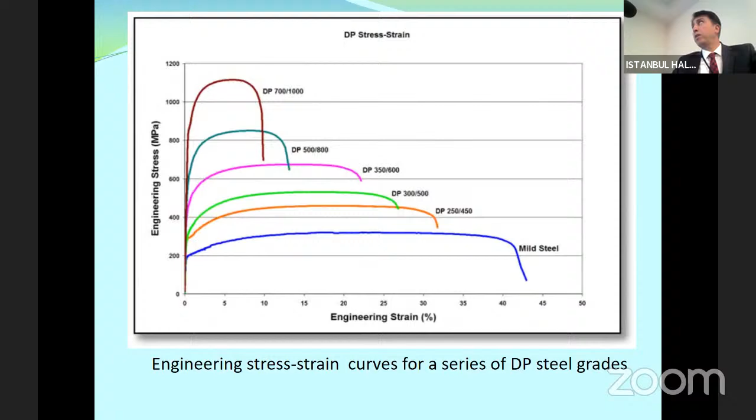Trip çeliği arkadaşlar yine karşımıza çıkan grup içerisindeki bir çelik türü. Trip etkisi şu demek: çelik içerisinde kalıntı östenit var, en az yüzde 5.

Biz malzemeyi deforme ederken, diyelim ki araçta trip çeliği var, bir yere çarptınız. Şimdi neler var? İşte martenzit var ya da östenit var. Kalıntı östenit burada çok önemli, hem uzayabiliyor hem mukavemet verebiliyor. Belli bir yere kadar uzarken malzemenin sünekliğini arttırmış oluyor. Belli bir yerden sonra da östenit martenzite dönüşüyor. Yani work hardening dediğimiz, çalışma sertleşmesi dediğimiz, plastik deformasyonla östenit martenzite dönüşüyor. Dönüştüğü zaman bu sefer mukavemet artmış oluyor. Dolayısıyla bir malzemede hem süneklik hem de mukavemet artışı istiyorsanız bu mekanizmayı kullanabilirsiniz.

Yani trip etkisi dediği, çelik içerisinde kalıntı östenit var. Kalıntı östenit bir yere kadar uzuyor, uzarken malzemenin sünekliğini arttırmış oluyor, malzemeyi sünek yapmış oluyor. Ama bir yerden sonra yeterince uzayıp gerilim belli bir yere geldiğinde kalıntı östenit martensite dönüşüyor ve çeliğe mukavemeti artıyor. Bu metodu çok kullanıyorlar arkadaşlar.

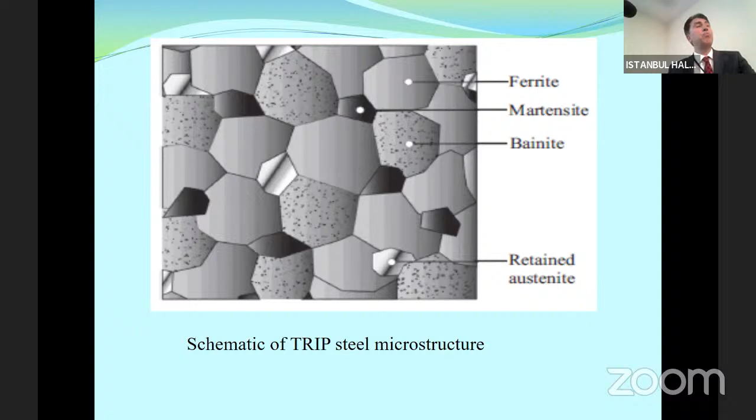Deformasyonun, plastik deformasyonun sebep olduğu dönüşüm. Bakın arkadaşlar, yapıda işte martenzit var, ferrit var, beynit var, kalıntı östenit dediği arkadaşlar var. TRIP çelikleri böyle arkadaşlar, yani birden fazla faz var yapıda: ferrit, martenzit, beynit ve kalıntı östenit var. Bu da mikro yapıyı gösteriyor.

Silisyum burada arkadaşlar kalıntı östenit oluşumunu artırıyor, ya da kalıntı östeniti daha stabil hale getiriyor. Çünkü çelikte silisyumun ya da alüminyumun etkisi sementit çökelmesini engeller arkadaşlar. Silisyum sementit çökelmesini engellediği için karbonu sürekli kalıntı östenit içerisine difüze ediyor. Onun için trip çeliklerinde çok önemli silisyum yüksektir.

Silisyumla beraber alüminyum varsa ikisi beraber diyelim ki %2'lik bir değer hedefliyorsun. Silisyumu %1 seçtin, bir de alüminyum gelmesi lazım. Ama normalde bir çelikte silisyumu çok istemeyiz. Yani normal bir döküm yapıyorsun ya da geleneksel bir sac üretiyorsun, silisyum fazla istenmiyor. Yani silisyum %0,2-0,3'ü geçmez fazla. Neden? Çünkü silisyum çeliği kırılganlaştırır. Ama burada istiyoruz çünkü kalıntı östenit oluşumunu artırıyor.

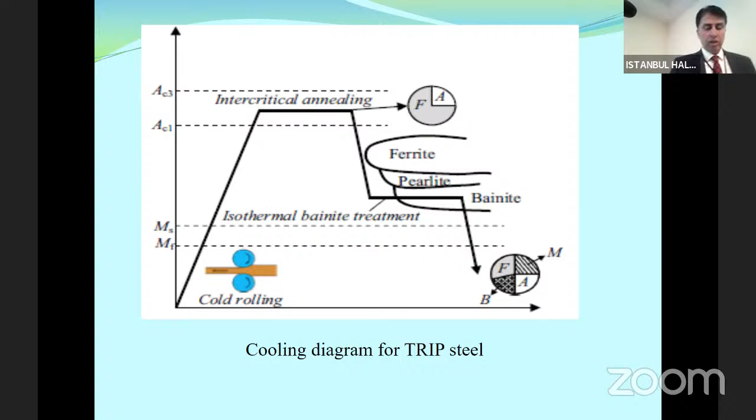Yani dedik ya, ileri yüksek mukavemetli sacları ileri yüksek mukavemetli yapan şey mikro yapısıdır dedik. Mikro yapısında birden fazla faz vardır dedik. İşte bu fazlar arkadaşlar buradan geliyor.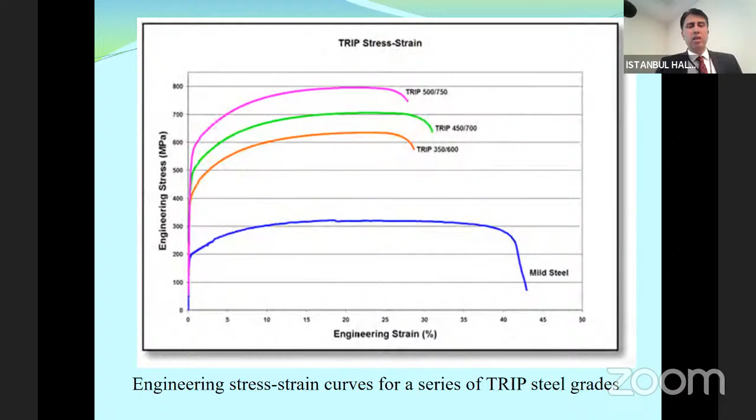Yine kıyas olsun diye sıradan bir mild steel dediği karbonlu çelikle gerilim uzama diyagramını kıyaslamış. Yine kompleks faz var arkadaşlar, o da benzer mantıkla çalışıyor. İleri yüksek mukavemetli çeliklerin en büyük özelliği birden fazla faz içermeleri ve kalıntı östenit, trip etkisi. Bunu unutmayın. Kompleks faz da benzer mekanizmayla çalışıyor.

Onda da aynı şeyler var ama şu soruyu sorabilirsiniz: hocam madem benzer mekanizmayla çalışıyorsa neden CP denemesi yapılmış? Sadece otomotiv saclarında dayanım süneklik falan dışında bazı önemli özellikler de eklenir. Mesela siz ne yapıyorsunuz? Delik veriyorsunuz. Orada mesela kenarlarda çatlama olmaması lazım, düzgün delinmesi lazım vesaire. Onu da arkadaşlar işte bu farklı gruplarda farklı özelliklerle sağlanır.

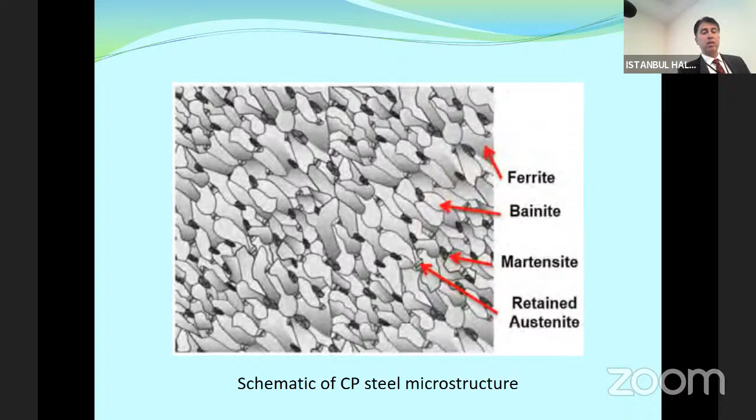O yüzden birden fazla çelik söz konusu. Sadece mekanik özellikler açısından düşünmeyin, bir de şekillendirilme vesaire açısından da düşünmemiz lazım. Kompleks fazın kimyasal kompozisyonu yine dediğim gibi düşük karbonlu. Mangan oranı belli bir seviyede yüksek. Silisyum bunlarda mesela düşük, o kadar yüksek değil.

Otomotivde kullanıldığı yerler yine kuşaklarda kullanılıyor, farklı yerlerde kullanılıyor CP çelikleri. Hızlı geçiyorum çünkü benim konum bir review değil, yani bizim deneysel çalışmamız var.

Martensitik çelik arkadaşlar, adı üstünde yapı tamamen martenzitten oluşuyor. Dolayısıyla bunu da yine aracın deforme olmaması gereken yerlerinde kullanıyoruz, özellikle yine kuşak kısımlarında kullanıyoruz biz bunları. Martensitik yapıda kısmen ferrit yapı görülebilir. Mikro yapısı böyle arkadaşlar, düşük karbonlu bir martensitik çelik yapısı.

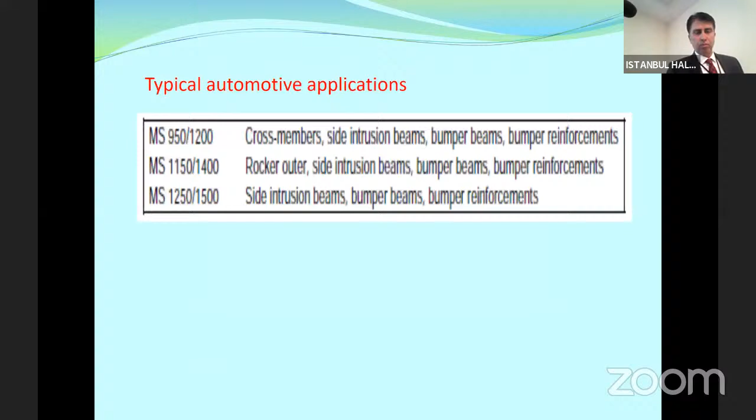Çekme diyagramı. Ferritik beynitik çelikler var arkadaşlar. Mikro yapıda hem ferrit var hem beynit var. Yine TTT diyagramlarını hatırlayın. Orada beynit bölgesine bekleyerek beynitik yapıyı elde ediyor. Dolayısıyla AC1, AC3 arasında çıkıp oradan beynitik bölgeye soğutup bu yapıyı elde edebiliyor.

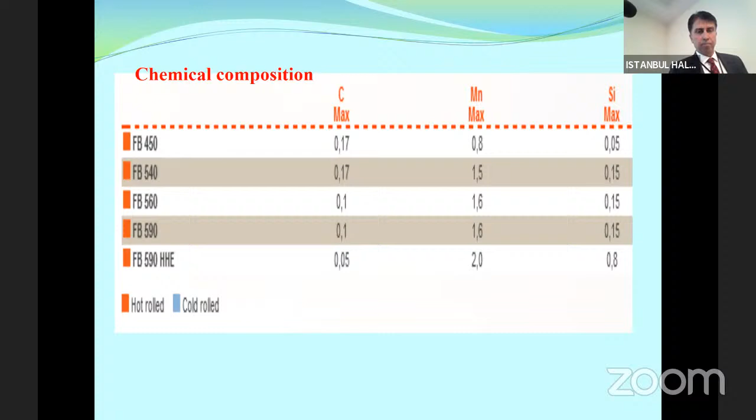Kimyasal bileşimi yine benzer şekilde düşük karbonlu. Mangan belli oranda yüksek. Kullanıldığı yerler var. Çekme diyagramı var.

Hot formed dediğimiz arkadaşlar, pres altında soğutmayı yapıyor. Yani bir parça üreteceksiniz, sacınız var, prese koyuyorsunuz, ısıtıyorsunuz 900 dereceye. Preste şekillendiriyorsunuz, çıkarmadan presin içinde soğutuyorsunuz. Presin içinde soğutma kanalları var, çıkarmadan soğutuyorsunuz. Ve bu size şunu sağlıyor.

Saclarda en büyük sorun, sacı sertleştirdiğiniz zaman spring back dediğimiz yaylanma meydana gelir, yani kısmen bozulur malzeme. Bu yöntem malzemeyi spring back olmaksızın gerçekleştiriyor. Yaylanma olsa bile kendi içinde kaldığı için parçayı çıkardığınızda parçanın şekli bozulmamış bir şekilde çıkıyor. Buna da press hardening ya da hot formed, yani sıcak şekillendirmeyle sertleştirilmiş bir yapı olarak karşımıza çıkıyor.

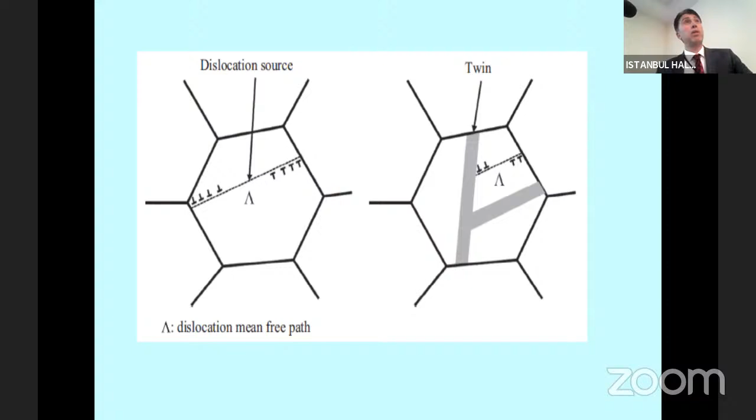Dolayısıyla TWIP çelikleri araçlarda kullanılıyor, çok yüksek uzamalara sahip. Yine otomotivde kullanılan yerleri görüyoruz. Bakın arkadaşlar, bir çelik 1200 megapascal çekme dayanımına sahip ama %20 uzama gösterebiliyor. Bunu da östenit sayesinde yapıyor. Yani östenit uzarken ikizlenmeyle şekilleniyor. İkizlenme oluştuktan sonra bu sefer ikiz sınırları hareket eden dislokasyonların önüne engel teşkil etmeye başlıyor ve dolayısıyla malzemenin mukavemeti artmış oluyor.

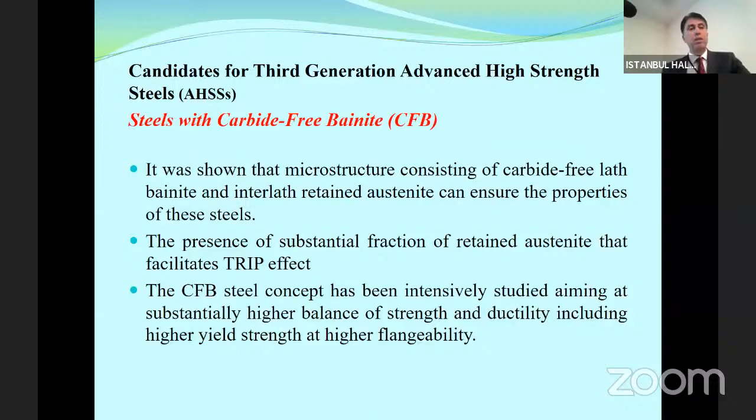Üçüncü grupta arkadaşlar, karbür içermeyen ferritik beynitik çelikler var. Medium mangan var ve quenching and partitioning denen, QP çelikleri diye bir çelik grubu var.

Yani bunlar popüler. Mesela ileride master doktora yapacaksanız bunlar konusunda çalışın, çünkü geleceği parlak, Türkiye otomotiv sektörüne giriyor. Dolayısıyla yarın öbürsü gün kendi aracımızı yaptığımızda mutlaka bu sacların Türkiye'de üretilmesi gerekecek arkadaşlar.

Şimdi benim konum şu: şu anda anlatacağımız, benim doktora öğrencimin tezinden çıkmış bir sunumu sizlere aktaracağım burada arkadaşlar.

Şimdi biz çalışmada 3. grup orta manganlı, 3. jenerasyonda orta manganlı diye geçen bir çelik üzerine çalıştık. Bu çelikte 0,16 karbon, 5,5 mangan var. Yani normalde bu mangan çok uçuk bir rakam, normal sayıda 5,5 mangan olmaz, en fazla 1,5-2 mangan olur ama bu grupta mangan %5 ile 10 arasında değişebiliyor.

Bunları döktürdük önce, 45 milimetre kalınlıkta dökülen parçalar 5 milimetreye inceltildi. Nasıl yaptık bunu? Sıcak dövmeyle yaptık, hot forging dediğimiz arkadaşlar, inceltik. Yani bir nevi saç ürettik. Analizimiz burada.

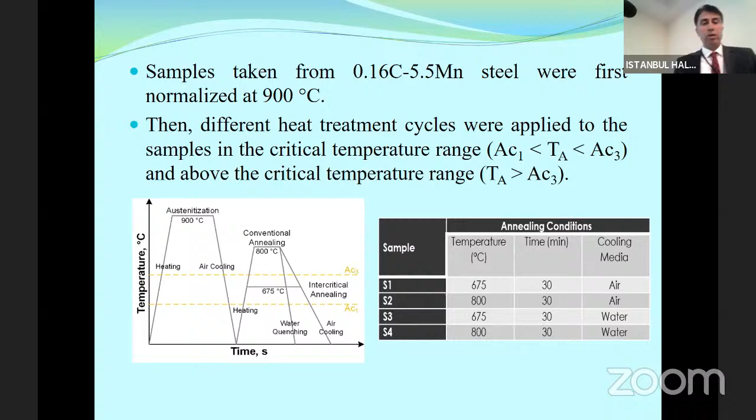Daha sonra biz bunları havada ve suda soğutup mikro yapısına baktık. Mikro yapıda hem A1 A3 arasında girdiğimiz bölgede hem de östenit bölgesinde mikro yapıda martenzit, ferrit, beynit ve kalıntı östenit yapıların olduğunu gördük. Burada mikro yapılar var, oldukça ince taneli. Daha sonra bunlara çekme testi yaptık, XRD yaptık, kalıntı östenit miktarını belirledik.

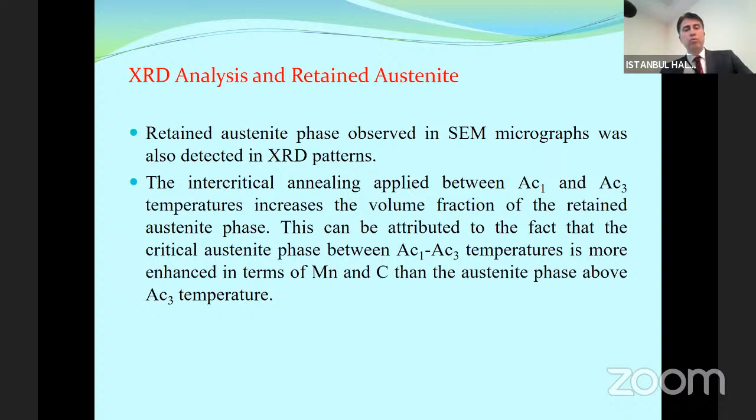Kalıntı östenitimiz bakın burada havada soğuyan 675 dereceye ısıttığımız çelikte, yani şu soru aklınıza gelebilir: 675 derecede çelik östenit bölgesine girmiyor, yani A1 A3 arasına da girmiyor diyebilirsiniz. Ama manganlı ve %5 manganlı çelikte A1 A3 arasına giriyor arkadaşlar, çünkü mangan AC1'i aşağı doğru çekiyor. Yani oda sıcaklığına doğru çektiği için kısmi östenit elde ediyoruz.

Daha sonra mekanik testini yaptık arkadaşlar. Bakın, 1200 megapascal, 1300 megapascal bir çekme gerilmesine karşılık %17 uzamalar elde ediyorsunuz. Yani bunlar büyük rakamlar, çünkü malzemede mukavemet arttıkça süneklik düşer. Ama bunlarda kalıntı östenit olduğu için malzemenin hem mukavemeti hem de sünekliliği yüksek oluyor. Tabii 800 derecede olanlar biraz süneklik düşük çünkü tam östenitlenmiş, bunlar kısmen östenitlenmiş arkadaşlar.

Nihayetinde geldiğimiz noktada elde ettiğimiz değerler bakın çekme değerleri, sertlikler. Sertlikler çok yüksek değil ama hatırı sayılabilir bir değerde.

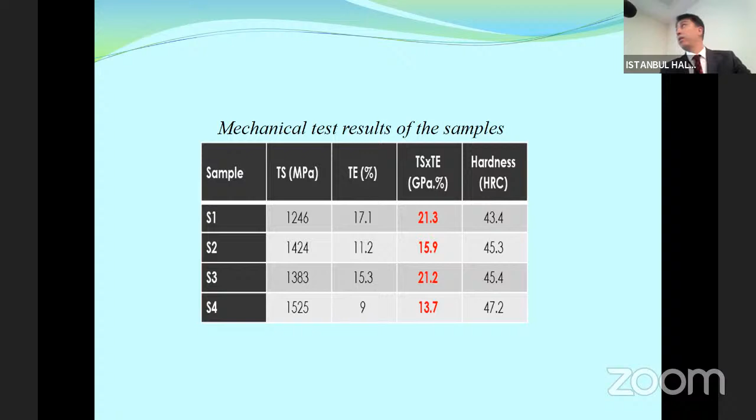Bir martensite göre tabii düşük sayılır ama kalıntı östenitten dolayı bir miktar ya da ferritten dolayı düşüklük var. Fakat şeyler yüksek sayılır, şu değerler oldukça iyi değerler. Çekme gerilmeleri.

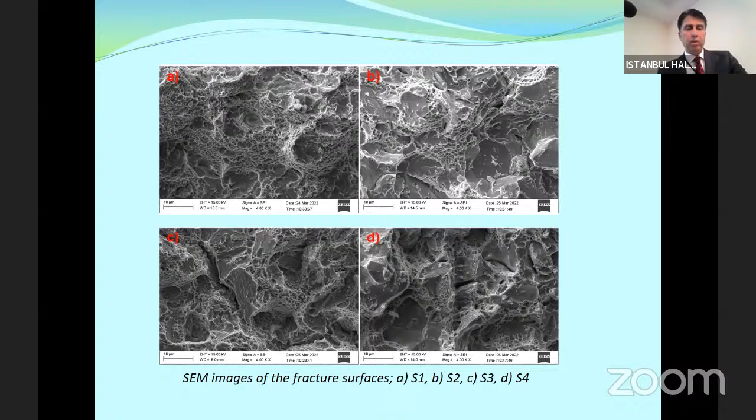Çekilmiş yüzeyde, kopmuş yüzeylerde mikro yapıya baktığımızda arkadaşlar, kırık yüzeye baktığımızda mix yani karışık bir mod görüyoruz. Hem sünek bölgeler var hem gevrek bölgeler var. Gevrek bölgeler daha çok martensitin olduğu kısımlar, sünek bölgelerde ferritik ve beynitik yapıların olduğu kısımlar olarak karşımıza çıkıyor.

Sonuç itibariyle, bizim araştırmalarımızda Türkiye'de ilk defa bu doktora tez çalışmasıyla böyle bir çelik üretildi. Yani ileri yüksek mukavemetli çeliklerin 3. jenerasyonunu, yani son jenerasyonunda medium mangan denen çeliği üretmiş olduk.

Arzulanan değerler tabii elde edilmiş oldu ama bunlar deneysel. Bundan sonra bir sanayi bunu alacak, sürekli kontinu bir saç üretecek. Yani bu böyle kaldığı zaman sonuçlar sadece laboratuvar seviyesinde ya da test seviyesinde kalır. Onun için bundan sonraki görev sanayicilere düşüyor.